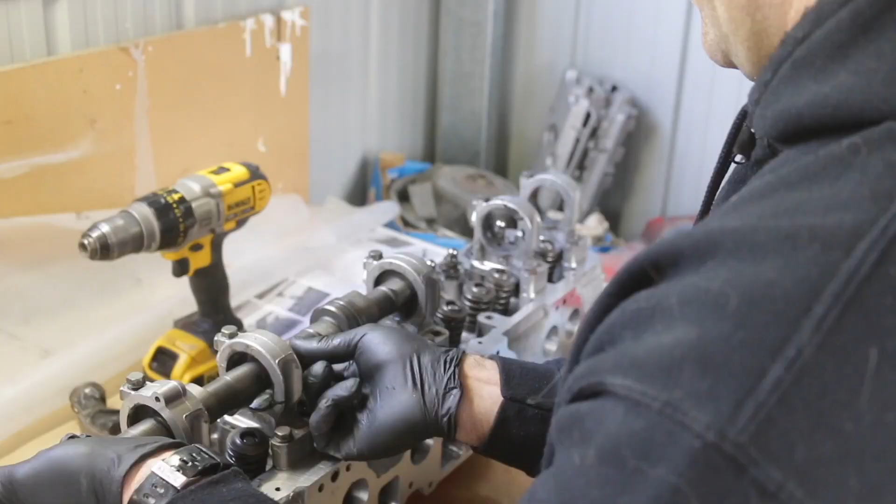Alright, so those of you watching last week will have seen that the engine and gearbox is mounted, and it's really tight in that engine bay.

Basically what I have laid out here now is the factory Alfa front end suspension setup. So we've got the suspension arms from both sides, and we've also got the factory steering column and steering box. So on this car, as opposed to most modern cars which have a steering rack, this actually has a steering box setup. What it essentially has, this box here has a gear drive in it that just moves this arm backwards and forwards, and this is the steering.

So there was this in the engine bay in the back corner, and that on the other side of the engine bay - so they basically took up a lot of space, and there is definitely not any room for that in the car. So what I need to start looking at is an alternative that is not going to take up this much room. This got me thinking, and I actually went down to M&I Spares, which is a Toyota wrecker.

And I got myself a Toyota Corolla steering rack. I searched high and low for a steering rack that would be the right size for my purposes, and I'm not sure even exactly what car this is off of. I believe it's a mid-90s Toyota Corolla, non-power steering rack, which is what I was looking for, and this is about the right size.

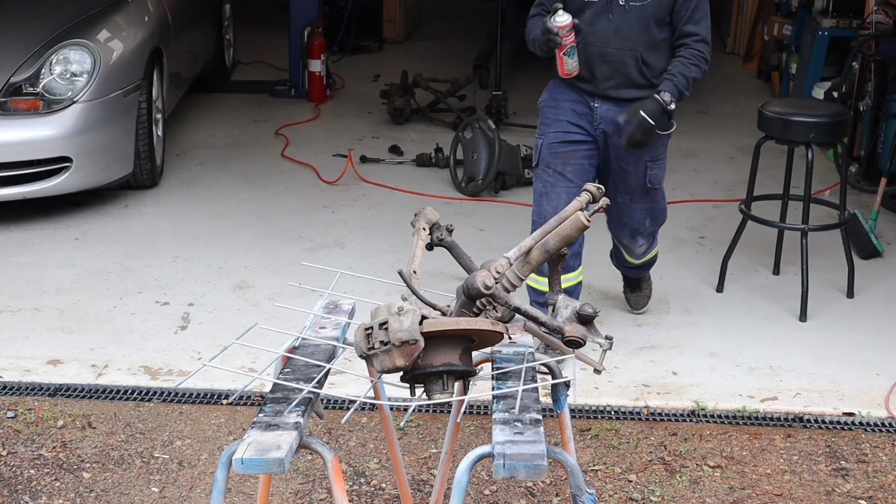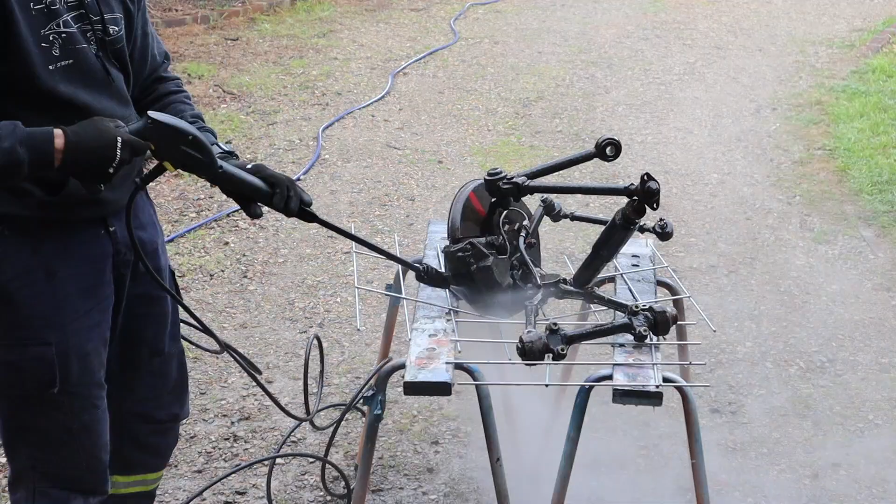Okay, so I gave the suspension components a quick tidy up. I will be using the basic suspension geometry on the car, that will be remaining, but obviously I'm going to be upgrading that suspension. Also, I'll obviously be upgrading the brakes, but for the time being, this is what I need to be able to sort out the steering.

So I'm going to bolt these back in now, and then we can start playing around and work out what I'm going to do to get this thing to steer.

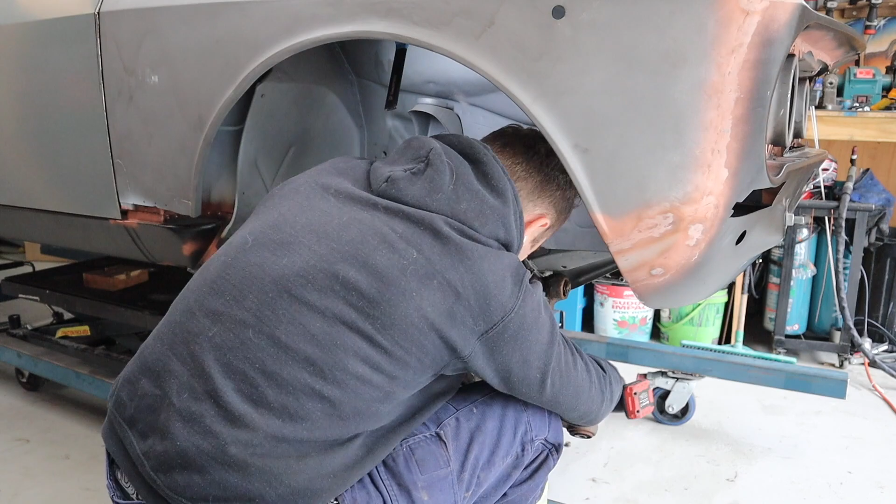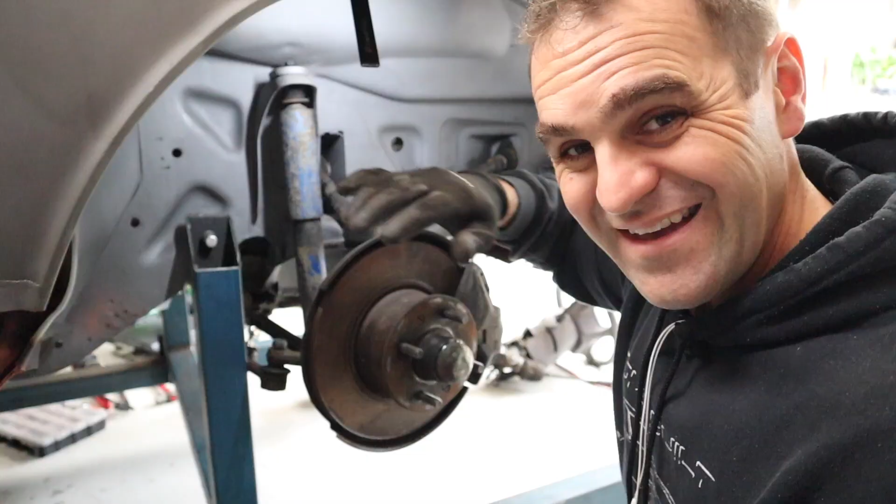So the suspension is all back in the car on both sides. It moves up and down. It's got the shock on it, and that moves through its normal arc of travel. So that's the way I need that.

But to put the steering rack in - you can see here, this is the original tie rod, and it's interfering with this upright, which is actually what's holding this whole structure together. So I have to remove these, or move these out of the way.

So what I'm thinking is I'll actually move this front frame over to this hole over here and remount the car over there. That does mean though that I have to take the engine and gearbox out again, and that will keep the ball rolling. So let's get onto it.

Okay, well my steering rack is mounted in on the other side, but on this side I can't actually get this tie rod end out of the original tie rod. So I'm going to take this piece off and put it in the press, but I want to take this piece off anyway, and I'll show you why in a little bit. So let's get this off and see if we can get this end out.

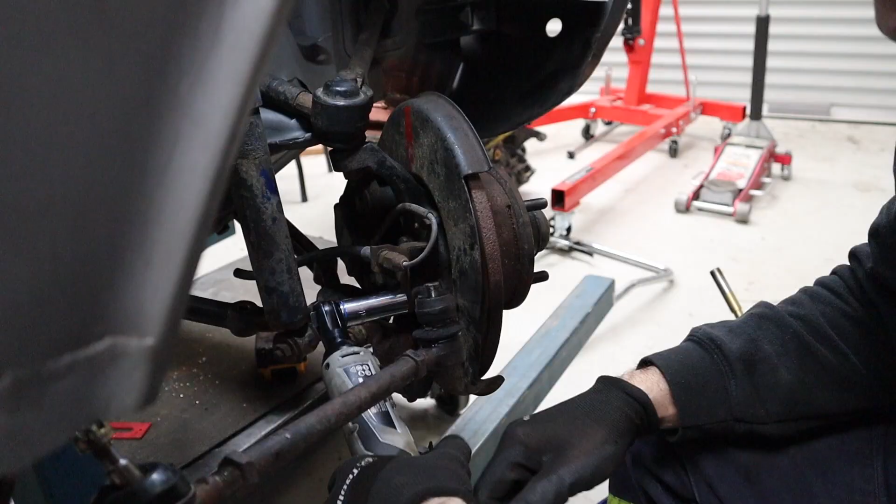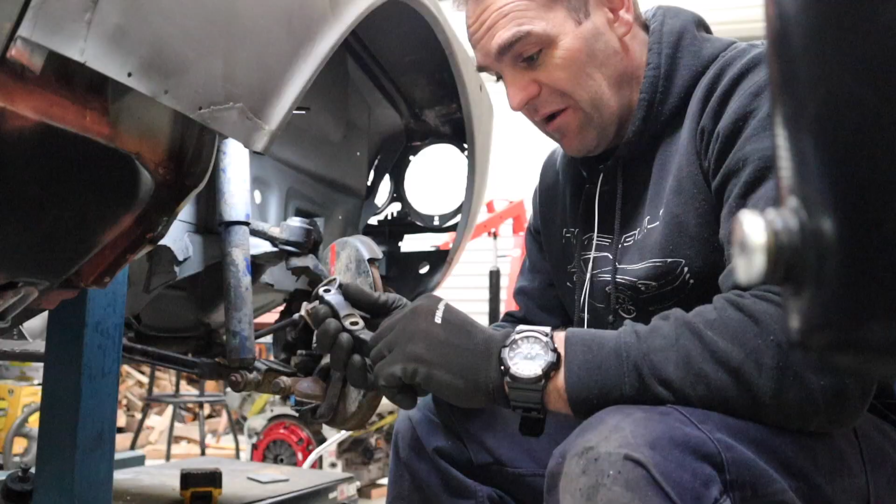Far out, that was tight. Wow, that let go with a bang. That was really tight. I'll just quickly mock this up, and I'll start talking you through and showing you my ideas with the steering rack.

Okay, so you can see through here, I've got the steering rack loosely mounted up, so it's going to sit up something like that. There are two things you need to be extremely critical of when you start playing around with steering: bump steer and Ackermann. I'll run through them quickly now.

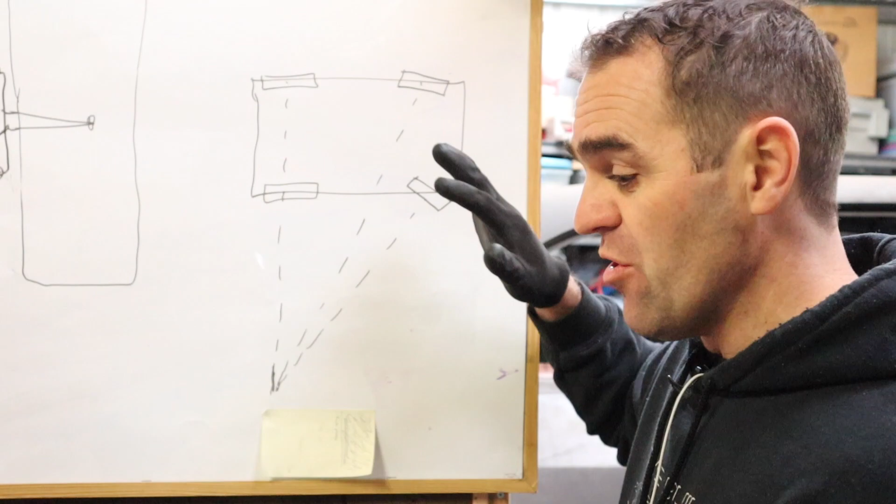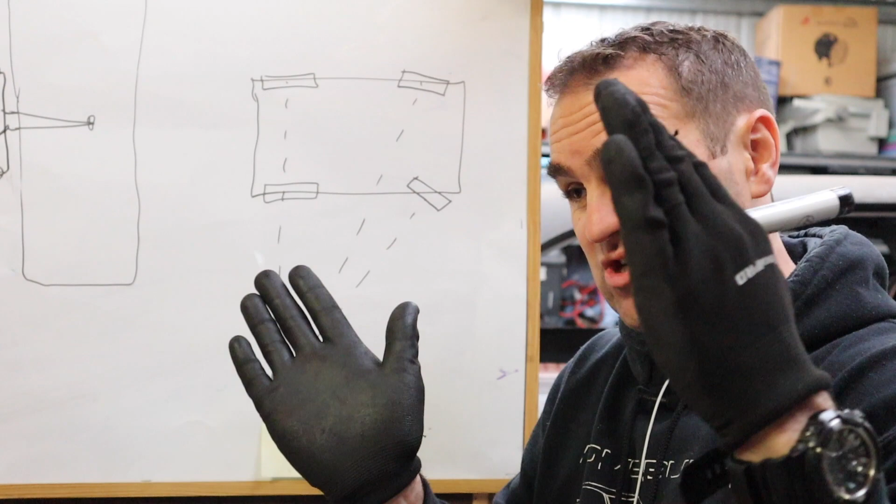I'm far from an expert on any of this, but one of the things you need to think about is Ackerman. This is a very rough, dodgy diagram I did of what Ackerman is. Basically, we're talking about the front wheels of a car. Whenever you turn a corner, the inside wheel is obviously turning a tighter radius than the outside wheel. So generally you need to set up your Ackerman so that when you turn one way, the inside wheel turns more than the outside, but when it goes the other way, the opposite wheel then turns more than the other. That's what Ackerman is all about.

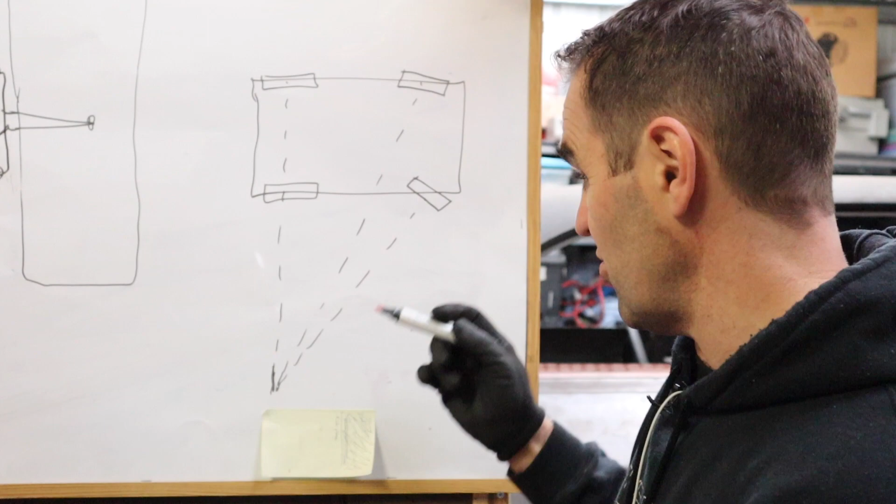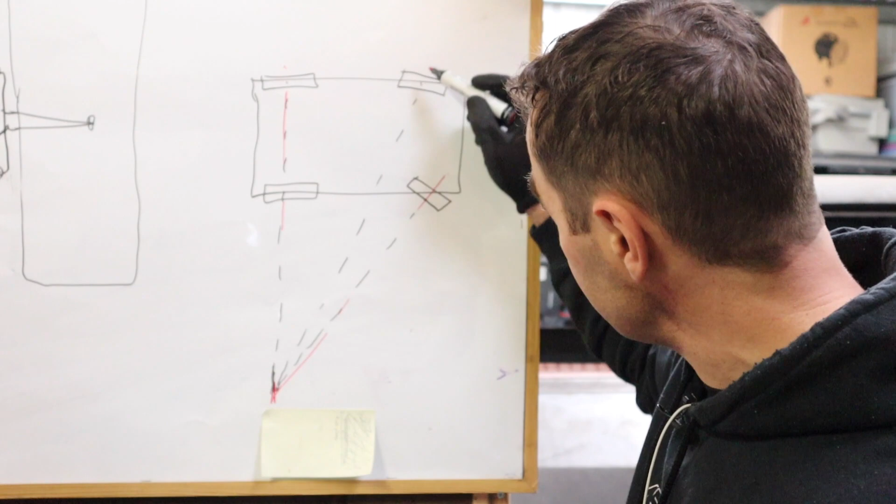Generally what you're trying to do is, if you draw a straight line through your rear axle all the way down to an imaginary point, and a straight line perpendicular to your front tyre on one side, the other tyre on the other side should also align with that. That way you don't get your tyres scrubbing out when you're going around a corner, because they're going around the same bend, if that makes sense.

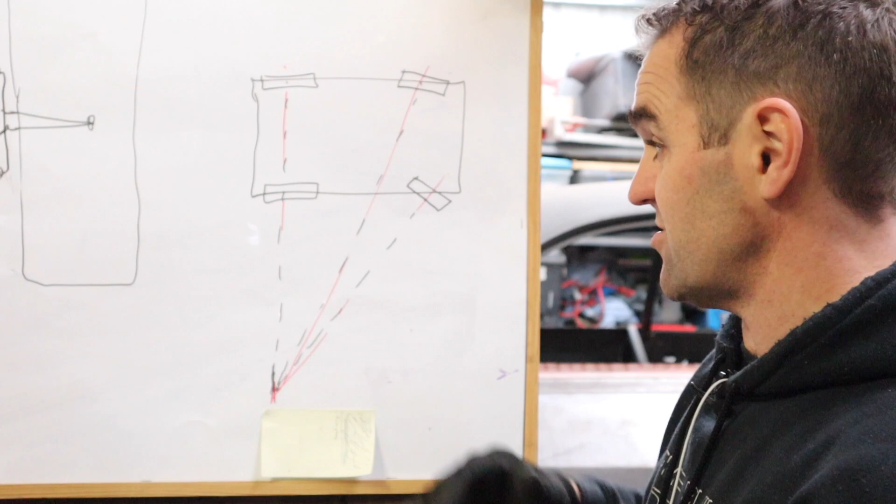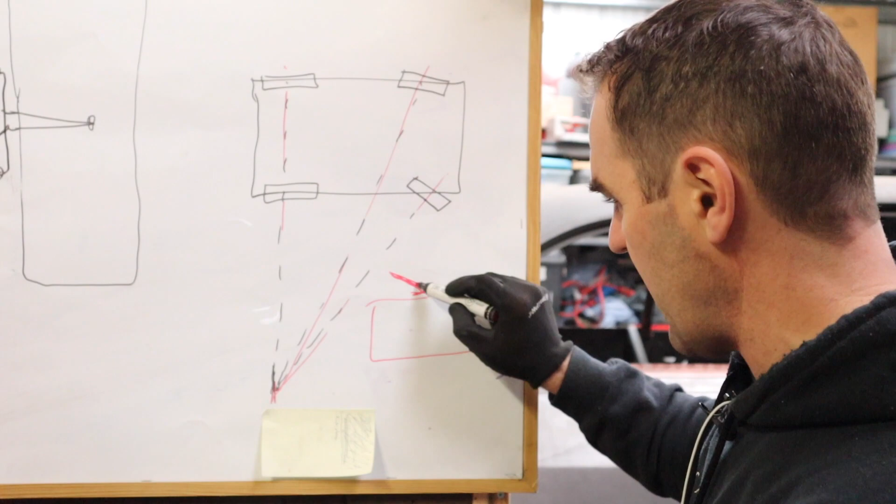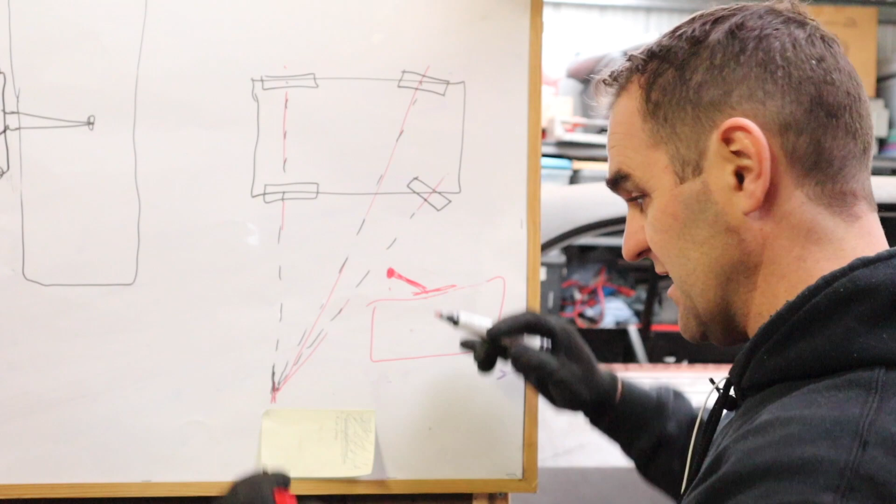So that is Ackerman. It's actually set up and should remain pretty much unchanged, because the way Ackerman is set up is based on your wheel and hub, where the steering connects, which is usually angled backwards slightly. That angle, in relation to the steering arm, is how you get your Ackerman on the car, and that's something I am not going to touch or change really.

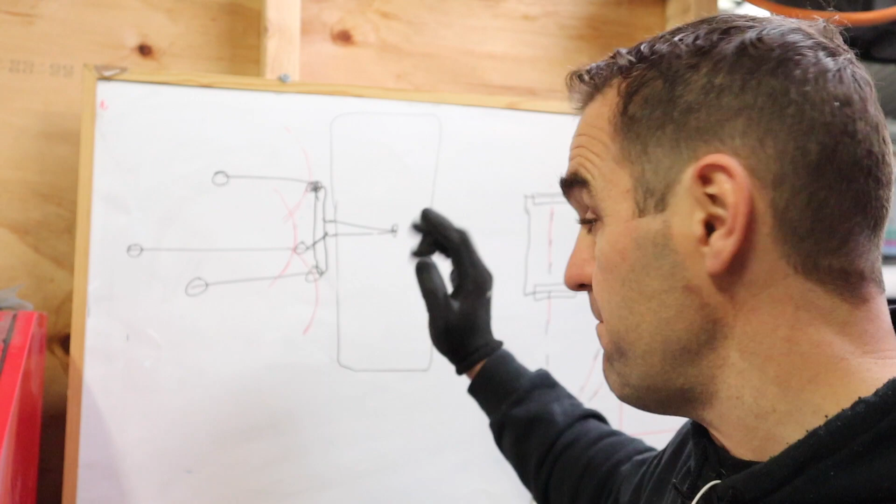The next thing I need to talk about is bump steer. Now, bump steer is something you do have to be quite careful about, particularly because I'm moving the steering rack, I am going to be affecting bump steer on this car.

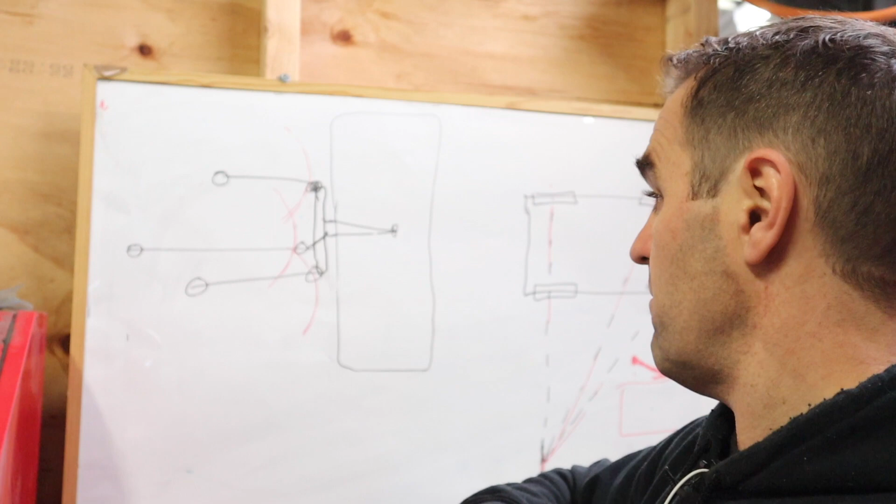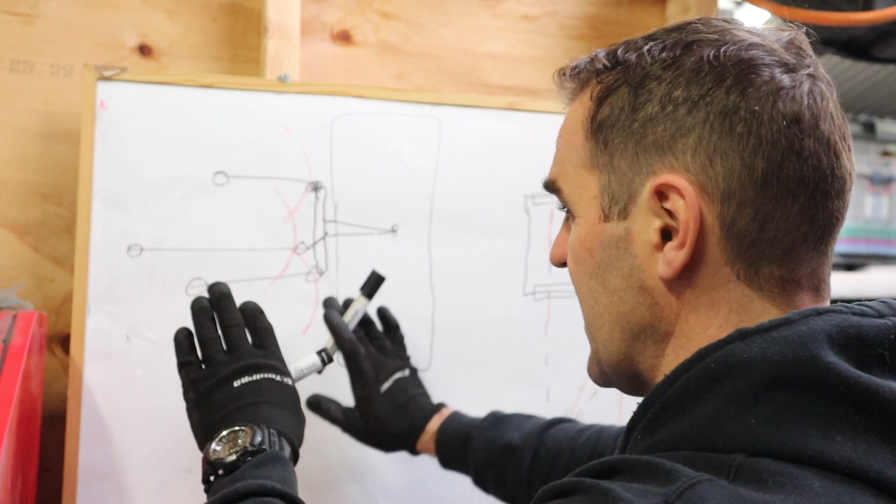If you imagine here's your tyre, here's your stub axle, and here's the mounting point on the back of the wheel - this is your suspension arm, your upper and lower suspension arm. These are fixed points on the car, they stay solid. And as the wheel travels up and down along the suspension travel, the upper and lower arms travel in an arc, which means the wheel actually does travel a bit like that as it goes up and down.

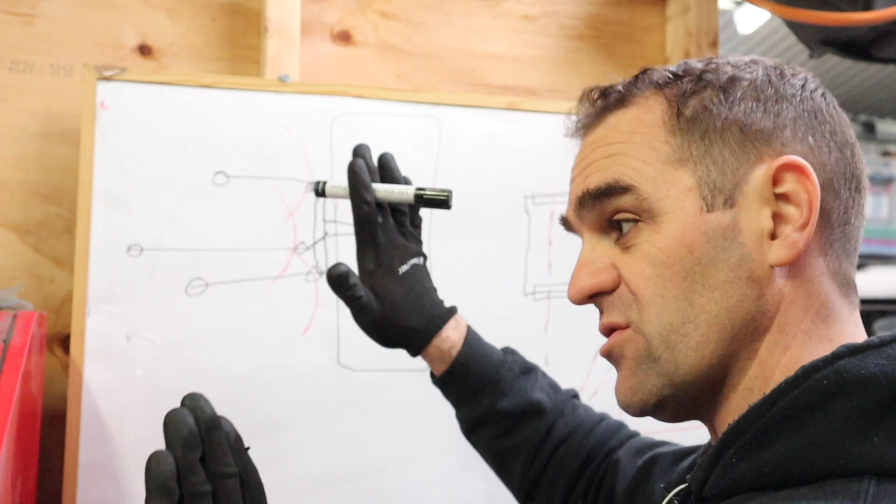Generally the top suspension arm is a little bit shorter, so that you get a little bit of camber as the wheel goes up into the wheel arch. As the suspension compresses, it gets a little bit more camber, generally because you're turning and it's getting a bit more contact on the road.

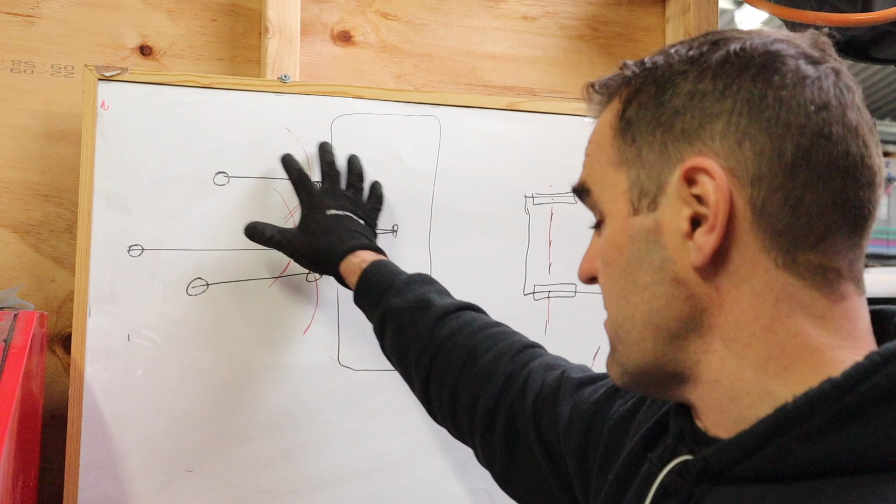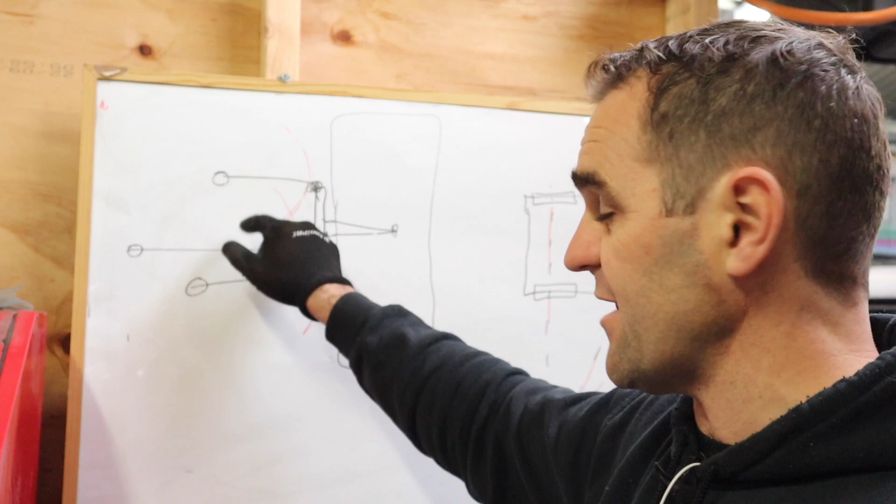That's the basic layout, and this here is the steering arm. Now, if you imagine, while this wheel is traveling up and down, the steering arm is also traveling in an arc. If it doesn't match with what the suspension's doing, it could pull the wheel in or steer the wheel out if it doesn't match up. That's why it's quite critical.

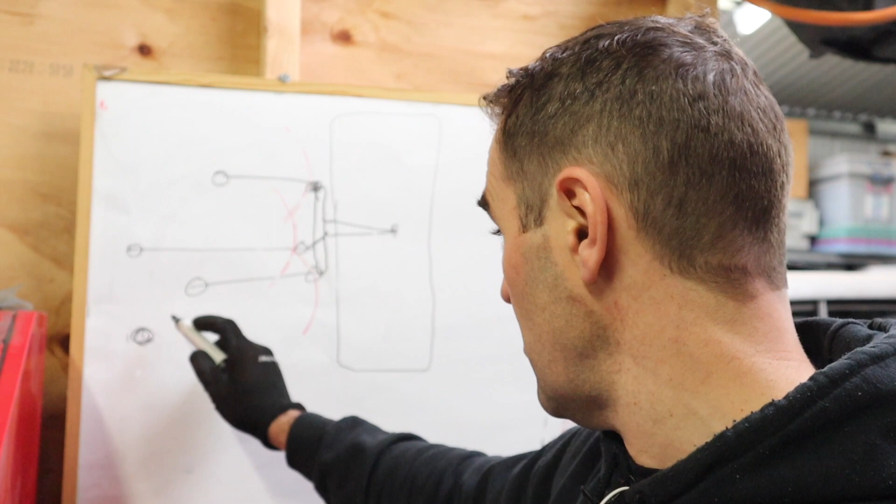Now, I am lowering my steering rack down to a lower point than what it originally was because I can't put it where it originally was. If I connected it up like that, the arc it's traveling wouldn't be similar to what the other arms are doing. As it goes up in the suspension, it's going to be pulling that wheel inwards and throwing the steering out quite a lot.

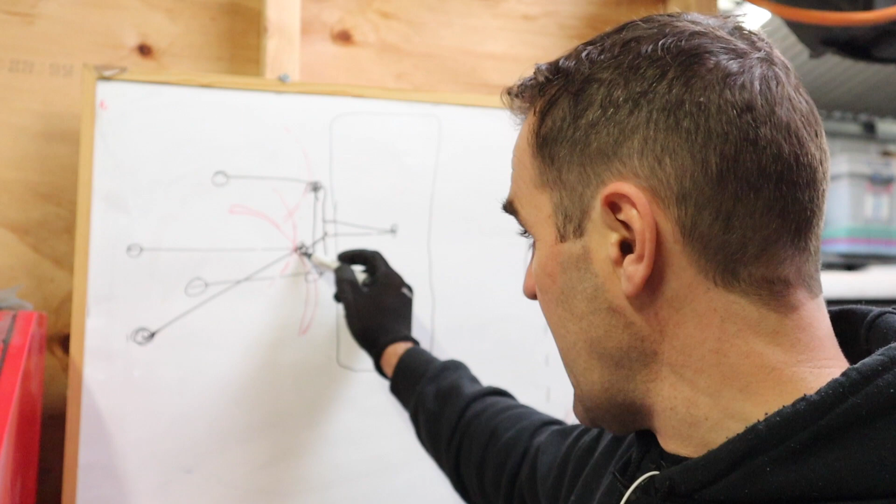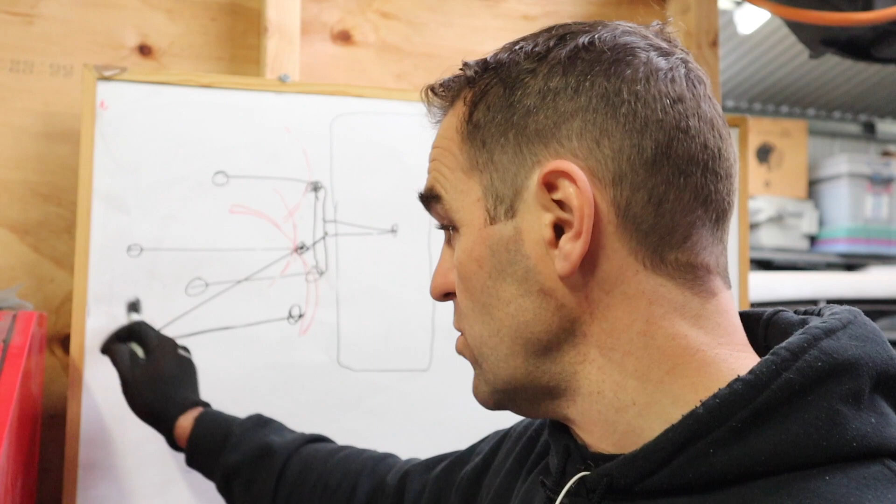Now, what I'm going to do is take that little arm I just pulled off, flip it upside down and mount it lower so that we keep a similar steering angle. Also, when I bought this steering rack, I was looking for one with similar pivot points to the original, because I wanted that distance to stay the same, matching what the factory had. Otherwise bump steer can be all over the place, and suddenly every time you go over a bump the car wants to tear you off the road, and that's not safe - something I am concerned about.

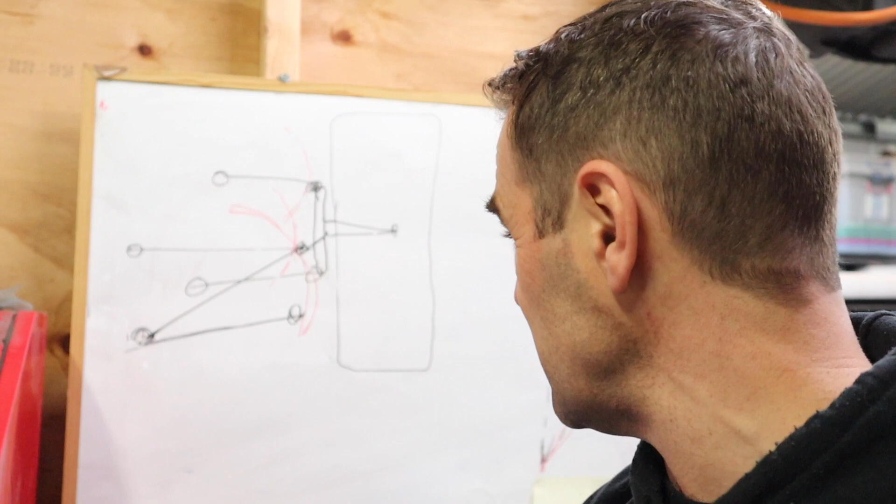So hopefully I haven't completely confused you, but that's roughly what bump steer is. All right, so this is roughly where I want the steering rack to end up.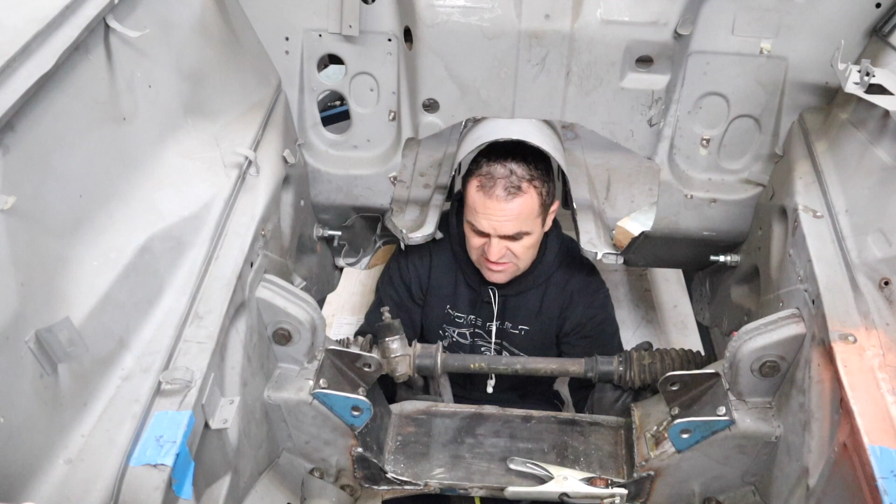Before I actually get to mounting it in securely, I need to make sure everything fits, clears, and is aligned the way I want it to. So I've got a couple of bits of angle iron here, and I'm going to tack them onto the bottom of the subframe so I can space and rest this steering rack in the right spot, make sure everything clears, and then weld it in for good.

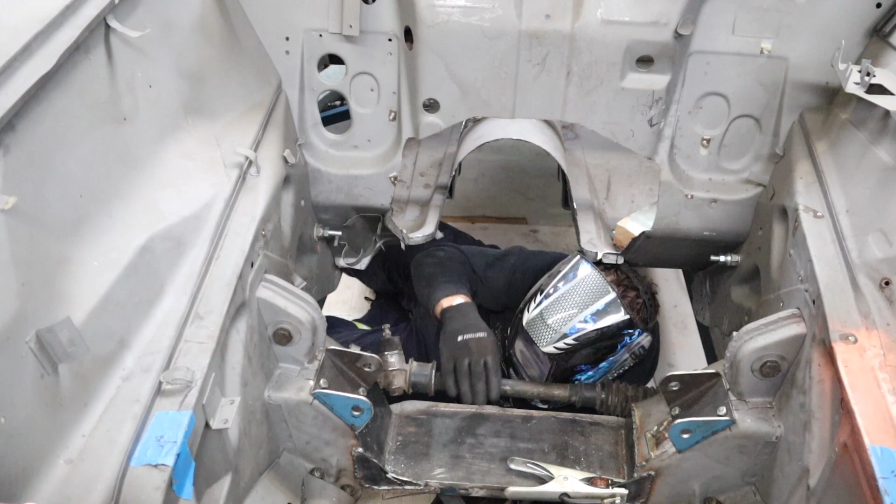Okay, so now I've got the rack roughly where I want it to be. The tie rods are too long currently, so the wheels are poking in. There's extra thread on this tie rod here, so I'm going to take the tie rod ends off and trim them back so I can hopefully get some reasonably straight steering. I'm not aligning it or going crazy, I just want it so they look roughly in the right spot, and then I'll put them back together again.

This tie rod is bent. I'm going to replace it later, I'm not that worried about it. I just want to get it pretty close for the time being.

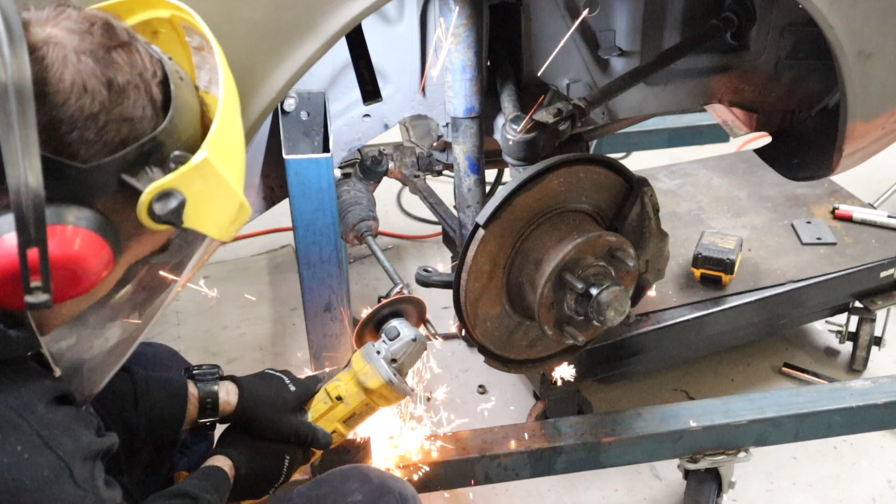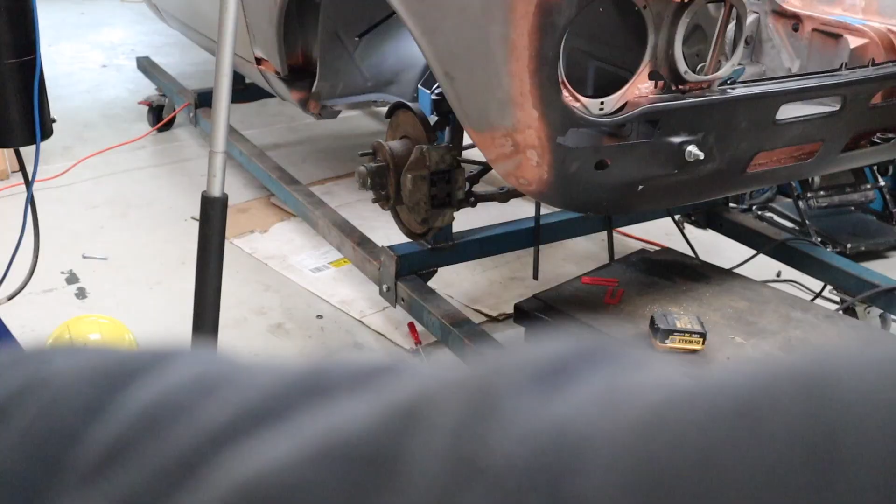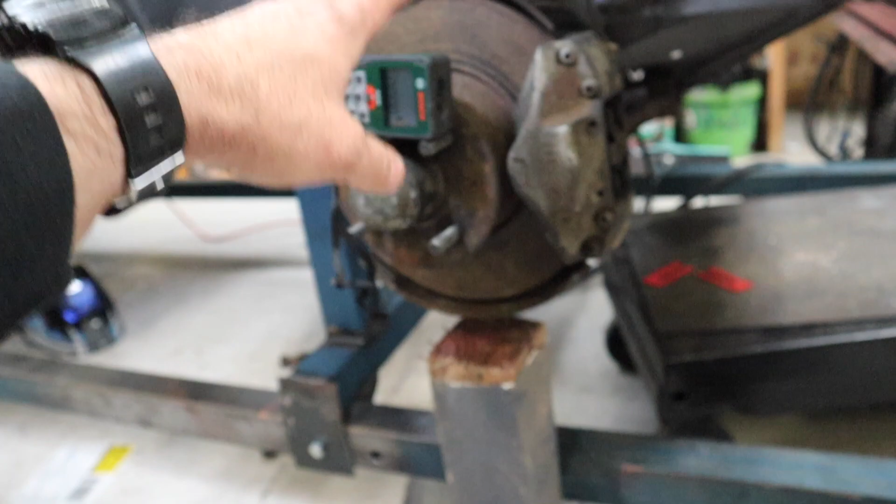I've just set this up here temporarily. I've clamped it in the back there, clamped the steering rack down to those bars I welded in, and connected up my tie rod just up here. I've set up my jack so it can jack up underneath the wheel, take it to full ride height and down, and I've set up my laser up here, and over this end of the workshop I've set up a board so you can see where the laser travels. At the moment you can see how bad the bump steer is. So I'll turn the laser on.

Now if you can see that laser, this is showing you how absolutely horrible the bump steer is. As I'm jacking the car up, the laser is moving, and it pretty much starts moving horizontally. That's supposed to be going up and down, and it's going side to side. So that is really, really bad bump steer. That's extremely bad bump steer.

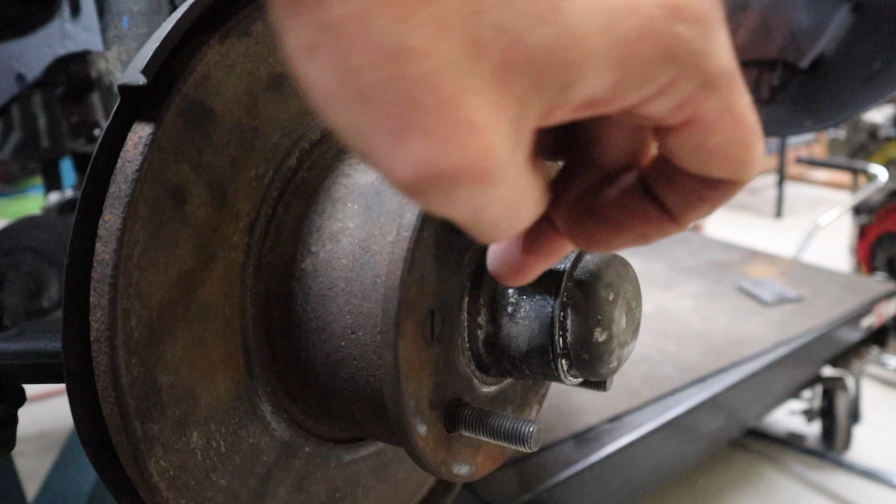Okay, so to try and rectify this bump steer issue, what I need to do is take this arm off the back of here. I can take it off, but to put it back on again, these bolts I need to be able to access, which are behind the disc. So I have to take the disc off and disassemble the front hub assembly. Let's do that on both sides, swap these arms over, and see if it makes a difference.

Alright, so I managed to get the disc off eventually. I had to actually grind down the lip on the edge of the disc - it had worn down so much that I couldn't get the pads off. It was being a real pain, so I had to grind the lip off, and then it came off reasonably easily.

So while I'm in here, it's a good time to mention one of the guys watching this show, Colin Byrne. He has raced an Alfa 105 tarmac rally car and won a lot of events in Australia in tarmac rallies, and has had issues with the front spindles of these. After a lot of work, he developed these bushings. They slide on over here like this, as opposed to what you would normally do with a bearing by tightening it up until you can just feel it moving and backing it off a little. This one you can tighten up all the way and crank it as hard as you like. It takes all the slop out from between the hub and the spindles, so they're a really cool piece of gear.

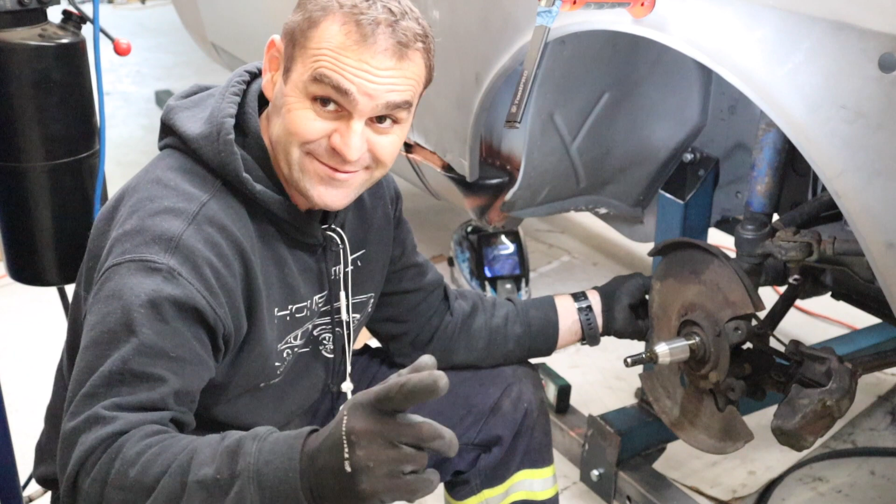He also has a YouTube channel which I highly recommend, I've been watching his series. He's got a Lancia Stratos replica that he's replacing the engine on, putting a V6 Alfa Busso engine into, and he does really high level machining stuff in his garage. It's well worth watching, I'll put a link in the description so you can check his stuff out, because I'm really enjoying it. He actually did a similar rack conversion on his car, and that's where I'm getting a lot of the ideas stolen from what he did to set up mine.

So I'm going to swap these arms over now, and we can keep moving forward.

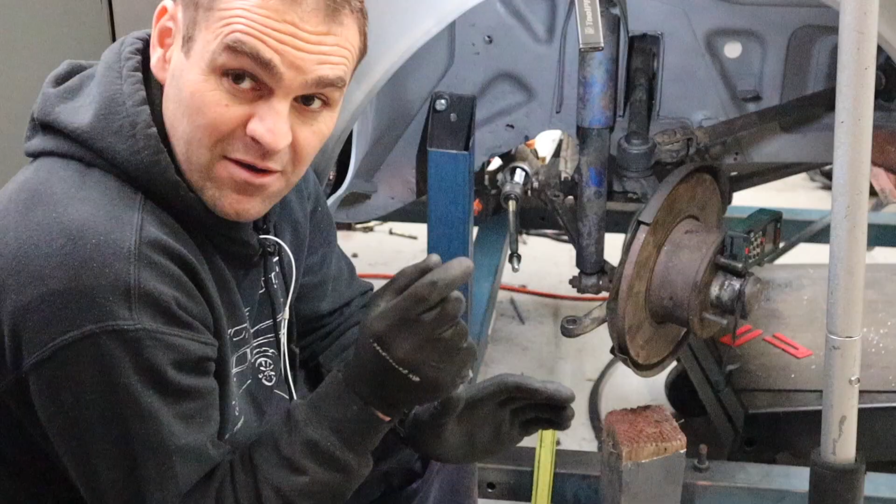Alright, so I've been going backwards and forwards for a bit now, trying to get the correct angles for my bump steer to actually work. What I've found is that if I put the tie rod in the way it's supposed to go, because this is a tapered fit on the top end of the steering knuckle, I can't get decent anywhere close to good bump steer. But if I put it in underneath, it seems to be much better. So I'm going to have to get rid of these tie rod ends. I mean, they need replacing anyway, and I'll have to order the correct size.

At the moment I managed to go and get some rose joints, so I'm going to use those instead and have rose jointed suspension, which is an upgrade a lot of people do anyway. It's a lot harsher - normal tie rod ends have got a little bit more cushioning in them. These are very direct and firm, but they should do the job nicely. I'm going to need to bolt them in from underneath and see how that goes, and try that as my tie rod ends.

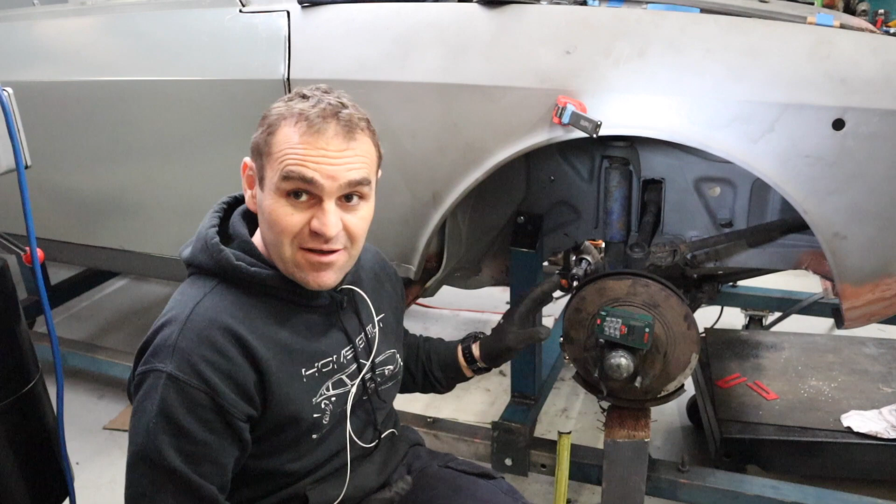Okay, hopefully the camera picked that up, but in that position I finally have almost perfect bump steer. The line does wave very slightly, but it's so insignificant - we're talking about a distance of, I'd say, 3 meters to where that board is, and it was moving maybe 20 or 30 mil over 3 meters. It's a very small amount we're talking. I'm calling that a win.

So we now have the rack in a position that works, but now I need to try and put the engine back in as it sits. So that's the next challenge.

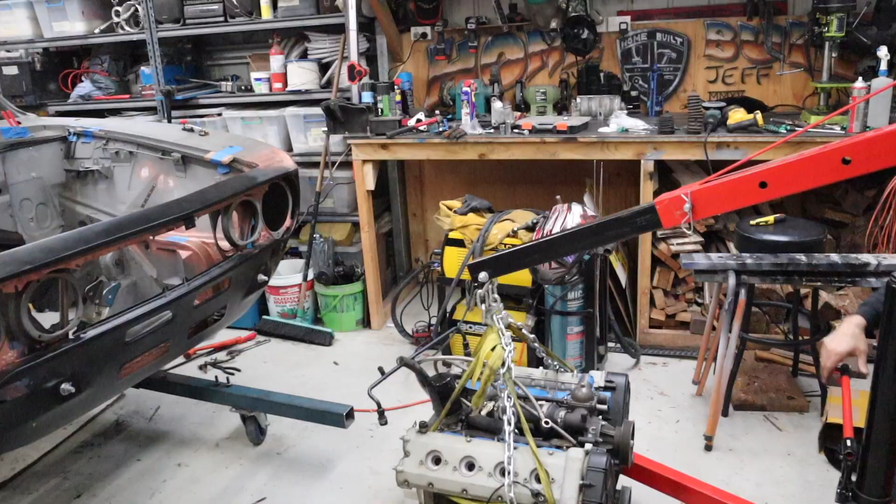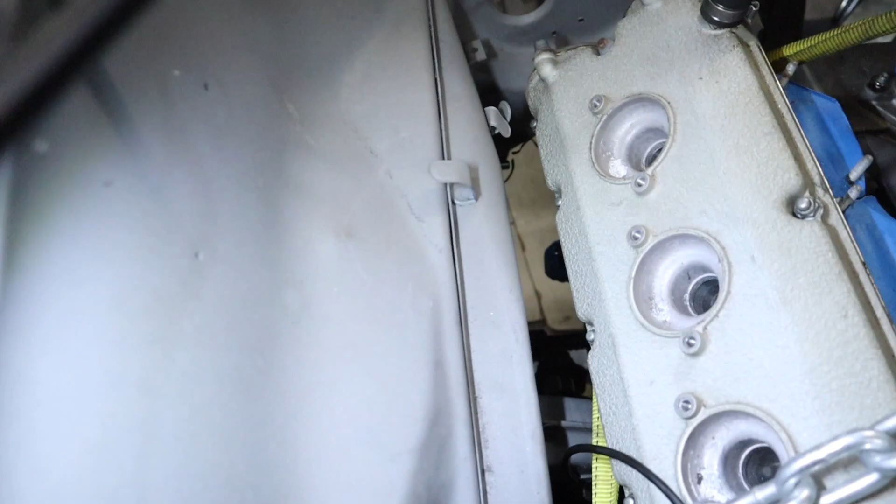Alright, well, the engine is mostly bolted in. I haven't quite got in the back edge of the bolt on this side, but you can see that the steering rack is clear. Only just, but that's all I need, is just.

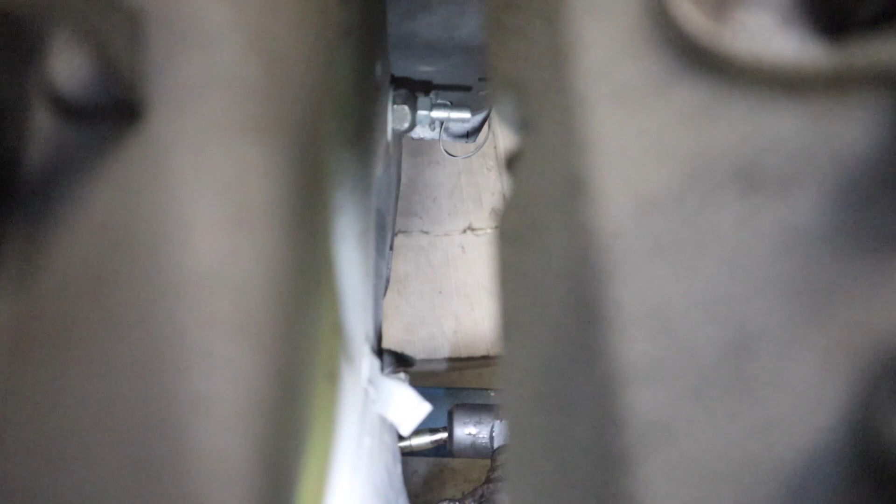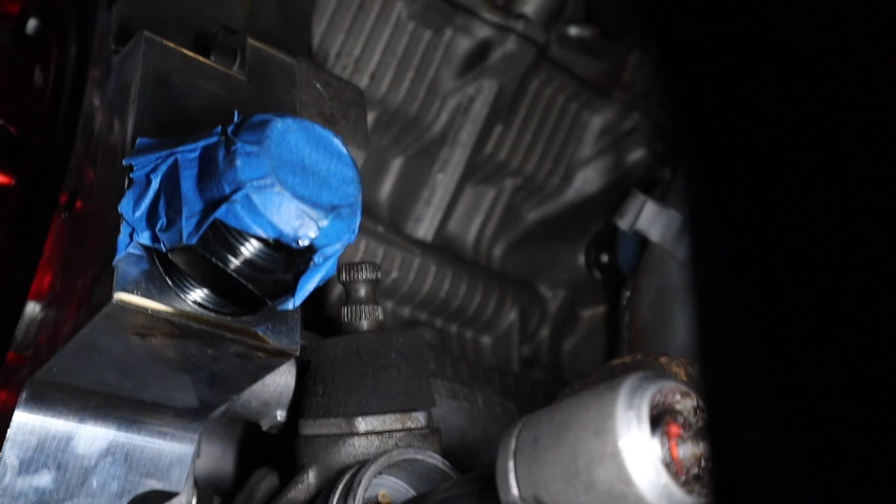Now down under here is a different situation. Here's the steering rack, here's the back of the adapter plate. The bolt that goes through the adapter plate, through the case of the block, is touching this boss on the steering rack. This is just a locating boss, so I can trim this out or make it fit, and I can also change the bolt I've got in there to give me a bit more space. Here's where the steering shaft exits and goes up. I'll just have a look at that now from the car side, but I think we can have just enough room to make it work.

Alright guys, well as always that took way longer than I thought it was going to, but I believe I have finally sorted it out, and we have the steering rack that is going to work in the car. We are going to have enough room - as I said, it's all tight tolerances. This engine is still far too big for this car, but it fits, and we can move forward. We're going to have a nice steering setup without bump steer. That is a very important thing.

Now, I still have lots more to do. I've still got to mount that rack, and I've got to chase up and get some more rose joints and things like that, but that is a relief.

So I think that means it's time for Fun Facts with Mrs. Jeff.

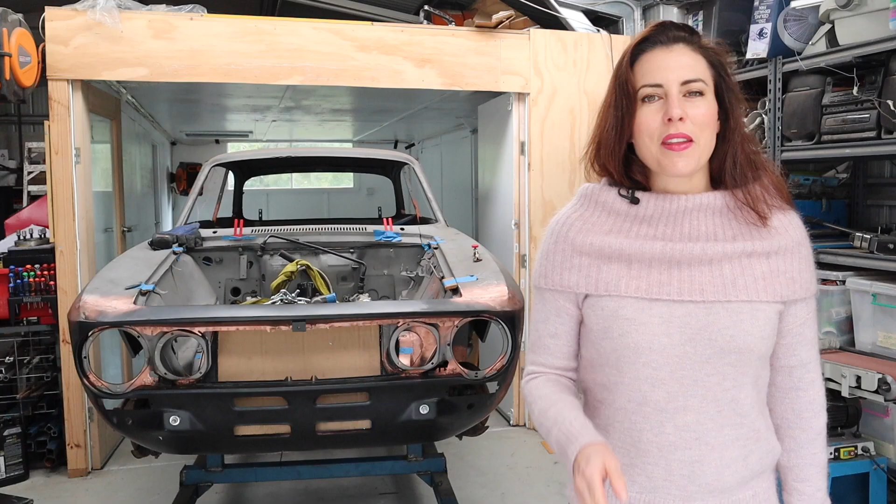In 1976, the Alfa Romeo Alfa Sud Sprint was introduced at the Turin Motor Show. Like the Alfa Sud, it was designed by Giorgetto Giugiaro, and based on the Alfa Sud mechanicals, but it had a lower, more angular design and a hatchback. It featured a 1.3 litre flat-4 engine, producing 75 horsepower. In 1979, the bigger 1.5 litre 95 horsepower engine was introduced to the lineup for the Alfa Sud Sprint Veloce. Then in 1983, Alfa Romeo had a range facelift, and the name went from the Alfa Sud Sprint Veloce to just the Sprint. Both the 1.3 and 1.5 litre versions remained, but the 1.5 litre Quadrifoglio Verde was introduced with 105 horsepower and green striping. The QV engine was upgraded again in 1987 to 1.7 litres and 116 horsepower. In total, 116,000 Sprints were produced during its lifespan.

Alright, we're making progress. We're getting there, and the steering is going to fit, which is a big win because there's not a lot of space, but I reckon I can make it work, which is a big win.

I mean, it kind of worries me when you're like, I'm just going to make it work, even if it doesn't fit. It'll work, I'll make it work. If Pinky can fit all that stuff in that tiny little Mini, I can fit this in here.